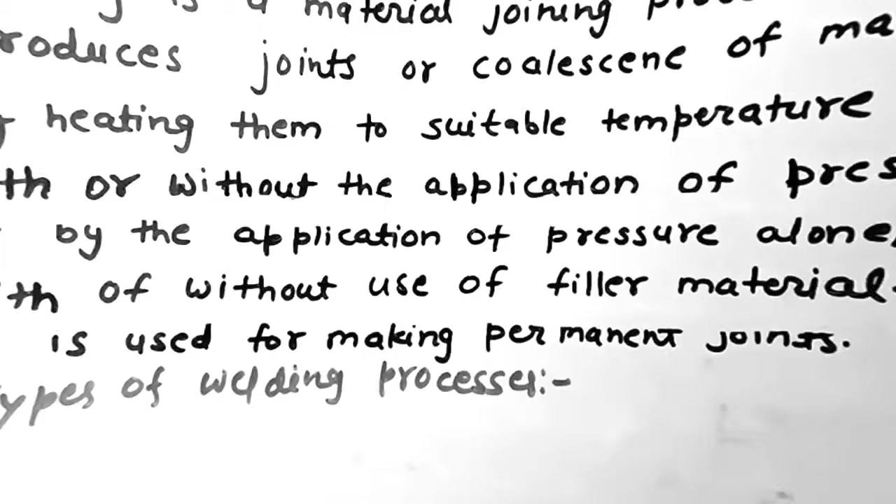Friends, today we will discuss the welding process. Here we will discuss what is welding, types of welding, classification of the welding processes, and we will see one by one all the welding processes. Okay, so first of all, let's see what is welding.

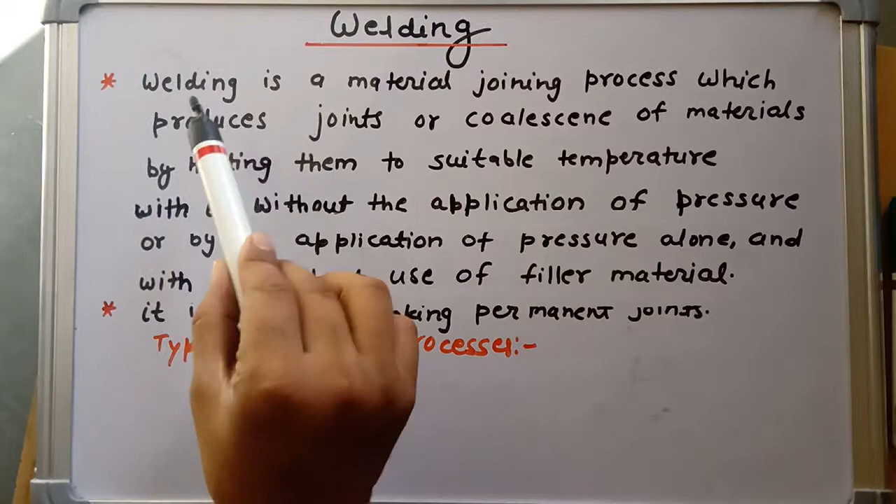So welding is a material joining process which produces joints or coalescences of materials by heating them to suitable temperature with or without the application of pressure, or by the application of pressure alone, and with or without use of filler material. So friends, the most important things in this definition to be remembered:

With or without the application of pressure. So here we can use pressure for the welding process, or we can also neglect the pressure. We can do welding by pressure alone. And the second one is with or without use of filler material. In some welding processes we use filler material, but in some welding processes we neglect the use of filler material.

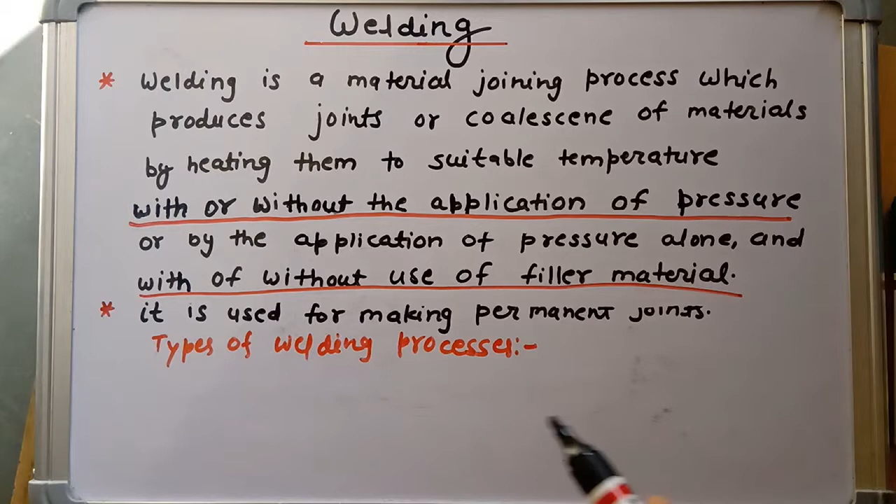So it is used for making permanent joints. Okay, so welding processes are used for making permanent joints. Now types of the welding processes. So friends, the welding processes are classified mainly into two types.

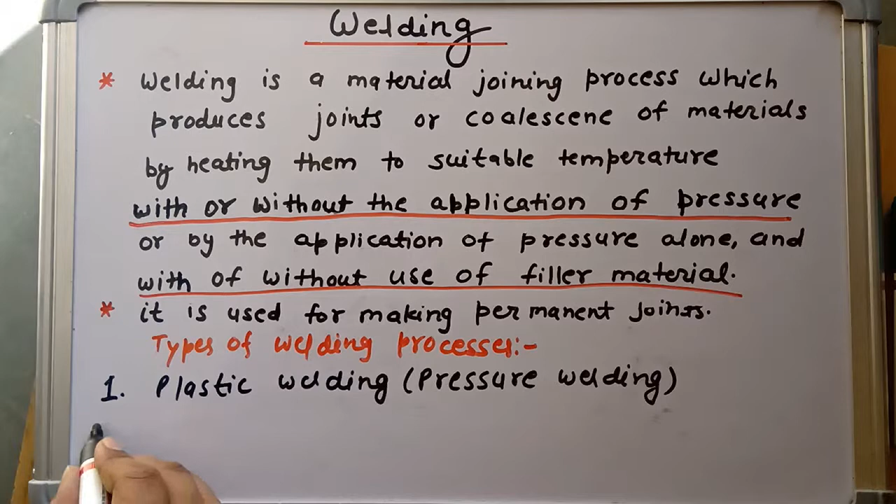The first type is plastic welding, or it is also called pressure welding. And the second one is fusion welding, and it is also called non-pressure welding.

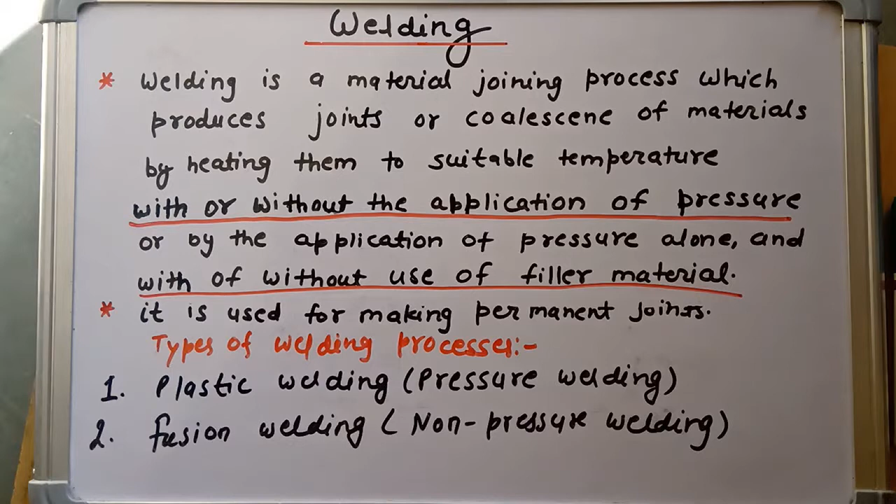Now we will see one by one both of the welding processes, how they are applicable in the industries, and what are the applications of these welding processes. Now friends, the first one is plastic welding, which is also known as pressure welding.

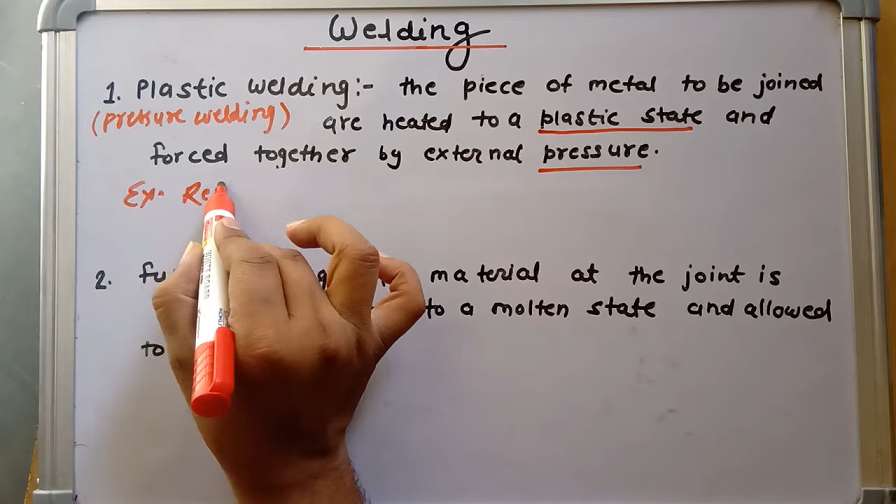The definition is: the pieces of metal to be joined are heated to a plastic state and forced together by external pressure. So in this welding process, we give heat to the material to reach its plastic state, and then we apply external pressure. In this way plastic welding is done, and examples of plastic welding are resistance welding and forge welding.

And the second one is fusion welding, which is also known as non-pressure welding. Its definition is: the material at the joint is heated to a molten state and allowed to solidify. So in this welding process we give heat to the material until it reaches its molten state, and then we allow it to solidify.

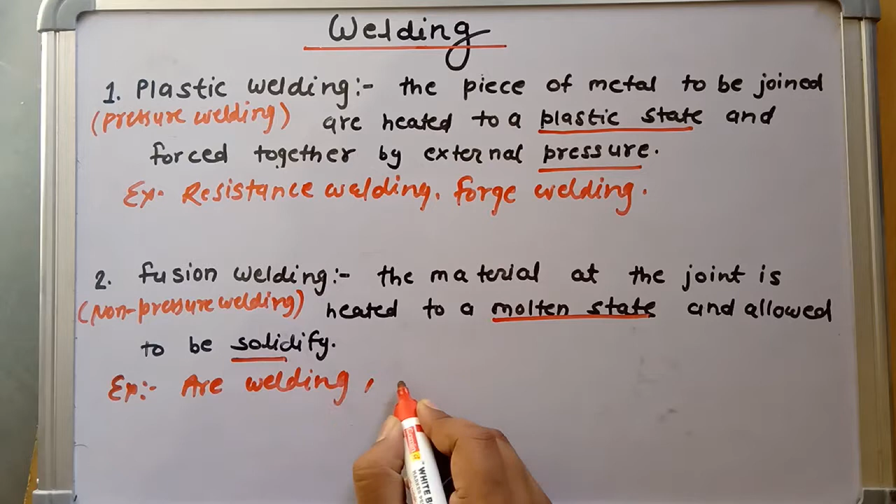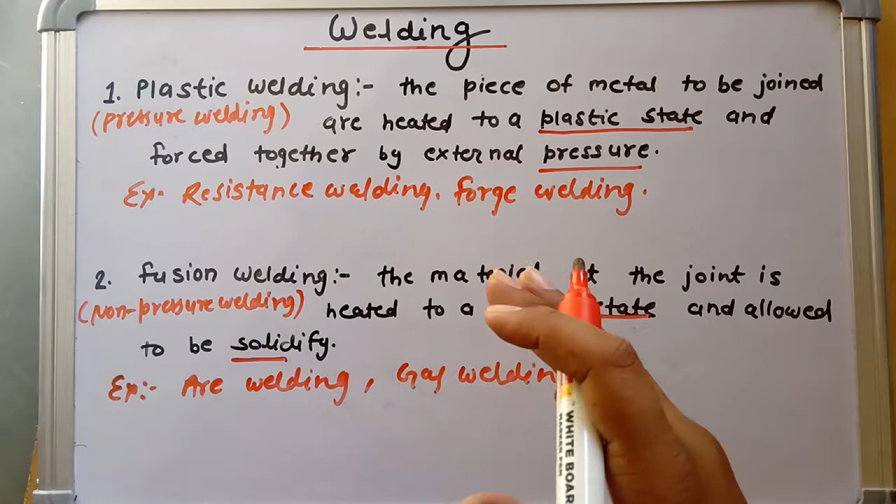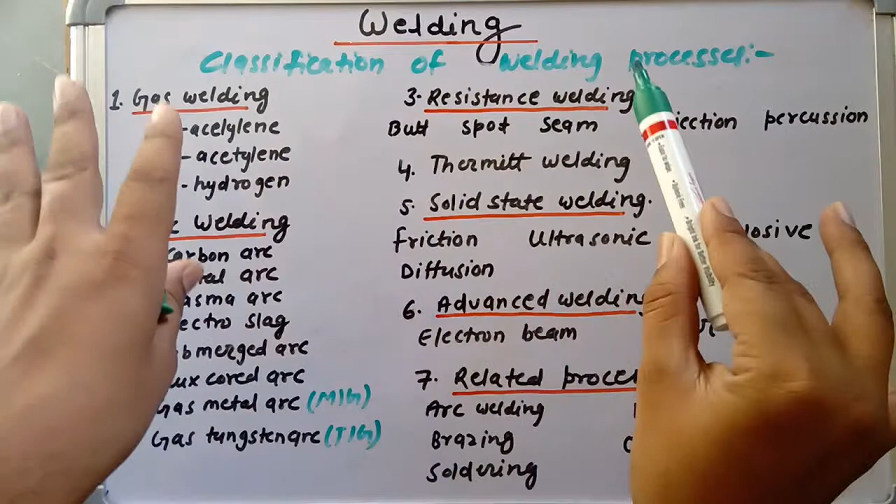Its example is arc welding, which is very familiar, and another one is gas welding. So this is plastic welding and fusion welding. Now we will discuss the classification of the welding processes. So these are all the classifications of the welding processes. Now we will discuss these processes one by one.

The first one is gas welding. Gas welding is classified into three categories: oxyacetylene welding, air acetylene welding, and oxy-hydrogen welding. We will discuss all these welding processes in our next videos one by one.

Arc welding is classified into the following categories: carbon arc welding, metal arc welding, plasma arc welding, electroslag, submerged arc, flux cored arc, and gas metal arc, which is also known as MIG. It is a very important welding. Gas tungsten, which is TIG, is also a very important and well known welding process.

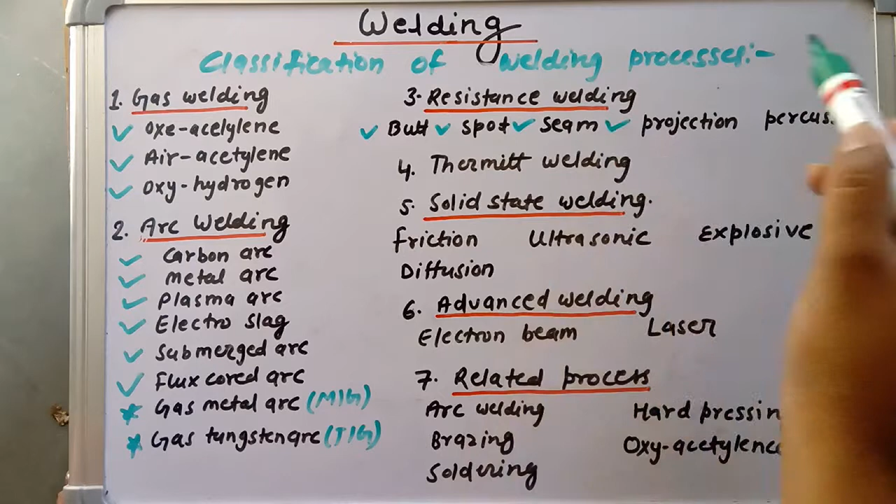The third one is resistance welding, which is classified as butt welding, spot welding, seam welding, projection welding, and percussion welding. The fourth one is thermite welding. And the fifth one is solid state welding, which is classified as friction welding, ultrasonic welding, explosive welding, and one more is diffusion welding.

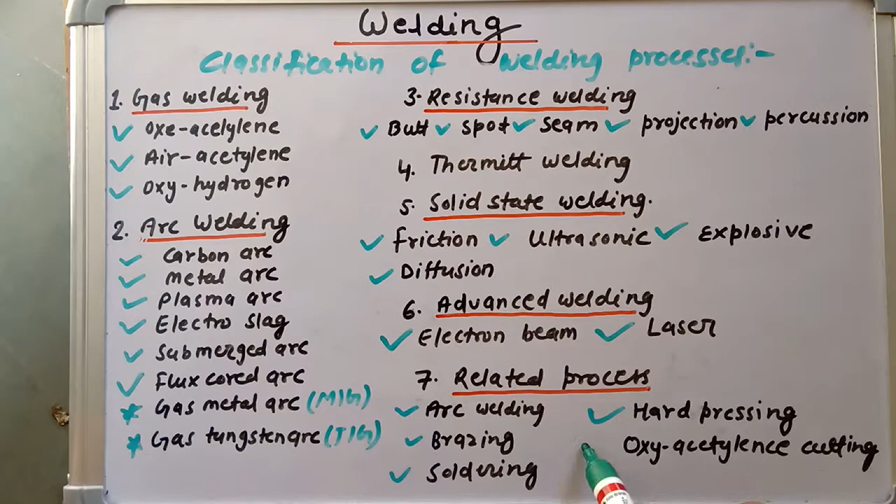The sixth one is advanced welding, which is classified as electron beam and laser beam. These are advanced joining processes, also known as newer welding processes. The last one is related processes, which are arc cutting, brazing, soldering, hardfacing, and oxyacetylene cutting. So these were all the classifications of the welding processes.